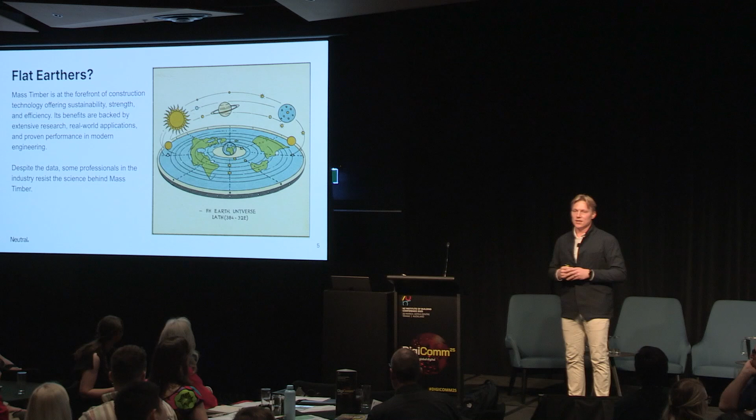What I mean is when we started this whole process and founded the company in 2019, there was no clear path for how we get approved with mass timber in the United States. There was no code, really nothing. We would have to go through all these alternative means and methods requests—variances. We decided, you know what, we'll take the challenge. We're a startup, and we're going to do it.

But what we ran into along the way are these people who said, no, that won't work. No, the building's going to burn down. No, this isn't safe. And we tried to prove them wrong.

One of the first guys we ran into was this fire marshal at the city of Madison. He had this big concern about, even though there had been a bunch of testing, flashover. If you don't know what flashover is—when a fire goes from a really small fire to when the whole building, or whole room, literally combusts. It creates this flash, and it goes from a small fire into a big fire, which could burn the whole building down, which of course would be bad. He said, if you can't prove to me that flashover is not unsafe in mass timber buildings, I will never approve your building.

We were proposing a 14-story building, and I was like, oh, this might be the crux—this might be when our company is dead. So I said, okay, what do we have to do to prove it to you? He said, you have to pay for all this testing, and you have to prove that we won't have a risk of flashover. So okay, I said, let's go through and do the testing.

We found a USDA Forest Products Lab located in Madison, Wisconsin, which is very fortunate. They donated their testing facility to us for free, so we just had to pay for the materials, because otherwise it would have been probably a $200,000 to $300,000 test. Fortunately, we went through the test, and we had just gotten to the end of it after 4 months.

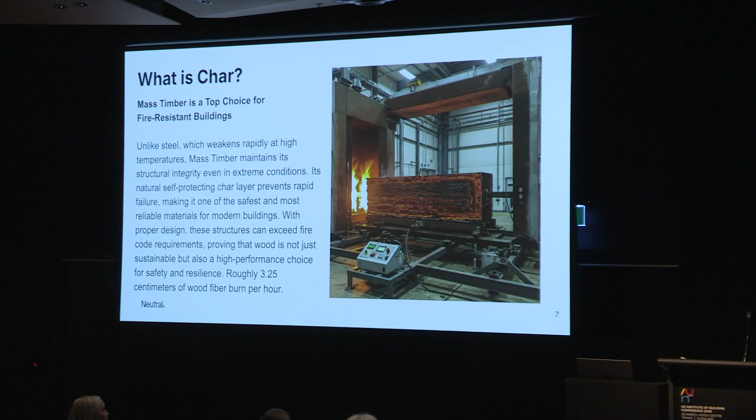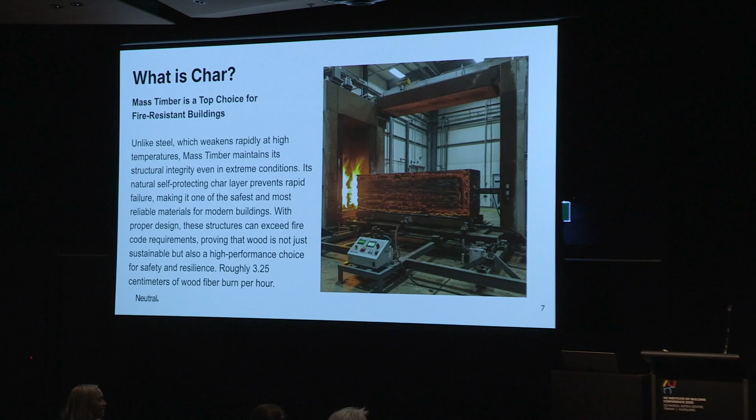We need 3 hours of fire rating for our primary elements, so we have to add that amount of fiber to accommodate the 3-hour fire rating. And that's what we call char.

That's why, if you're asking about CLT—or maybe that's a bad word, I found out yesterday—mass timber is a safe material. It's actually even more safe than steel and concrete, because you can accurately predict the amount of burn no matter how hot the fire gets. Unlike steel and concrete, where at a certain inflection point the steel actually starts to bend under the weight of the heat. We believe mass timber is one of the safest materials to use, and that's why we're advocating for it across the country and the world.

So Bakers Place, this is our first case study into our mass timber foray. This is a 14-story, 206-unit building right in downtown Madison, Wisconsin. We're just wrapping up at the end of this month, and we learned a lot of lessons on this project.

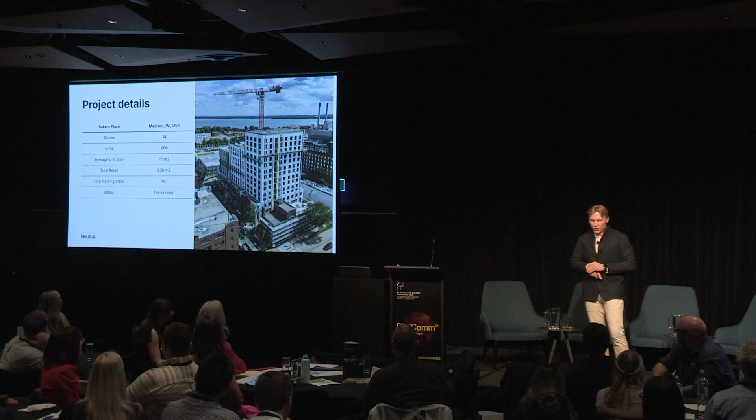It's been one of those projects that I'll probably look back on in 10, 15 years and say we were stupid, we were idiots. There's so many things we did wrong, but we would never be able to get to where we are today without figuring out all the challenges we had.

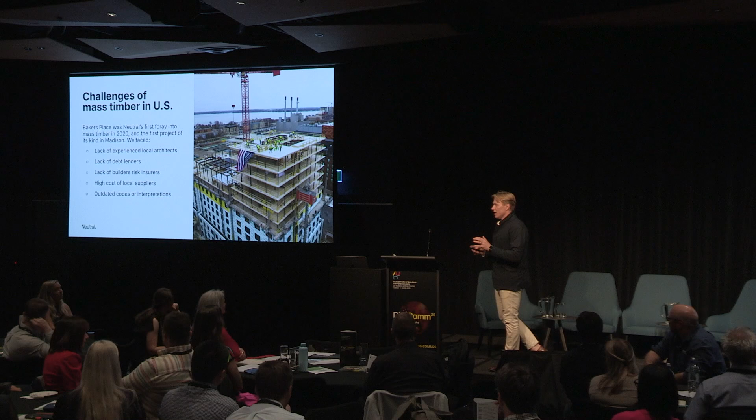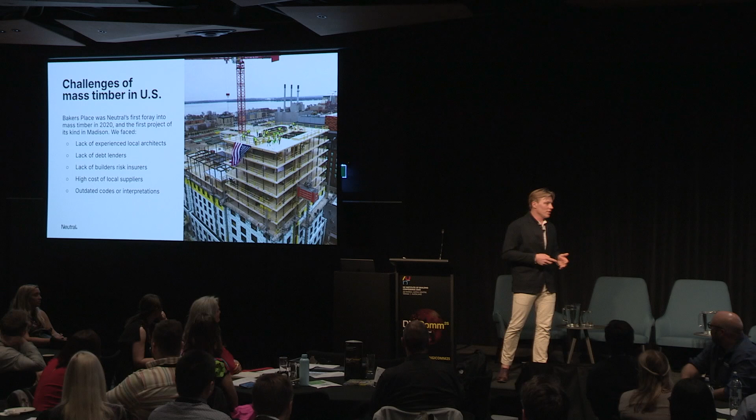Just a few challenges to walk through: we found a local architect, because we weren't vertically integrated at the time, that didn't have a lot of mass timber experience. Because of that, they weren't really understanding the nuances of all the different things compared to steel, concrete, or stick frame that you have to think about and design for. So if you're thinking about building a mass timber building, try to find someone with a lot of experience.

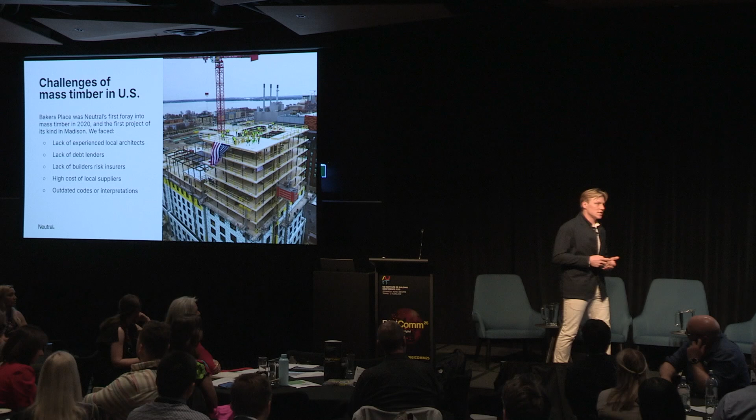The other thing we'll talk about later in the presentation is how we financed our buildings, because a lot of lenders, even equity partners, did not like the idea of mass timber because it's risk. It's new, it's unknown, and that adds layers of risk above the layers of risk of already building a development in downtown Madison.

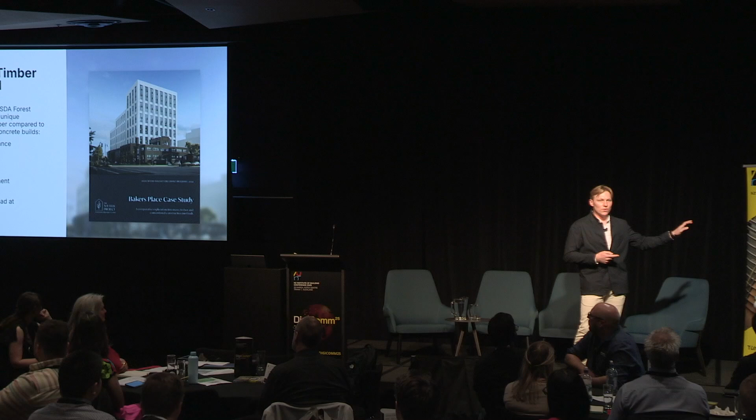We also looked at a few different systems because we wanted to understand the cost-benefit analysis of mass timber versus steel and concrete. USDA gave us a wonderful grant, and they allowed us to model 3 or 4 different buildings up to a level 400 design in BIM, price each one, schedule each one, understand the carbon impact of each one, and look at the cost-benefit analysis of a full mass timber system, a hybrid system, a steel system, and a concrete system. You can go on our website and find that. I won't get into all the details, but if you go to neutral.us, it's right there.

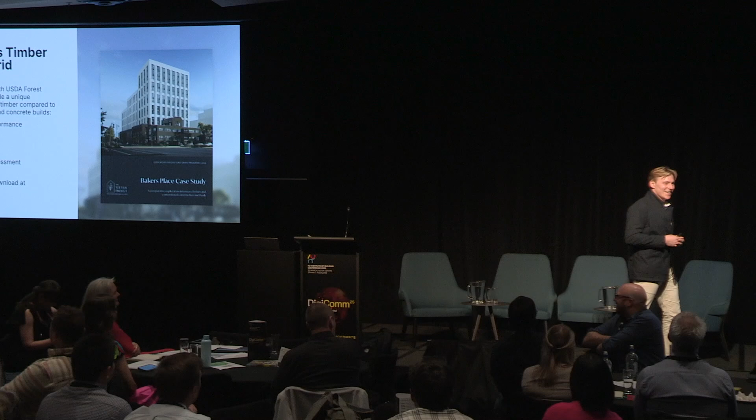Because when we went out to bid this project, we had gone through all of design development, and we went out to bid with our contractors—who are great contractors—and they came back and said, Nate, it's $40 million over budget. And it was an $80 million budget. I was like, oh no, this is terrible. I thought it was the end of our company. This is existential. We were almost out of money.

And I was like, we need to get this project in the ground, otherwise we're not going to have a company any longer. So we went back to the drawing board and did some of this analysis. We were able to value engineer about $30 million out of the scope, and part of it was switching the structural system to this hybrid structure.

On the next project, we decided not to do the hybrid structure for a few different reasons, which I'll get into. But this is the project from last fall where we're just topping out the structure, and you can kind of see the structural elements that are steel and then the ones that are not.

So Neutral Edison is a building that we just started — actually, last week we broke ground. It is a 31-story mass timber, almost fully mass timber building that will be the tallest mass timber building in the world once complete in May of 2027.

We also are pushing the boundaries on sustainability. We have Passive House certification, and we're also the tallest and biggest Living Building Challenge certified building in the world. If you're not familiar with LBC, I would definitely look into that certification. I think it's one of the most holistic certifications because it's not only looking at carbon or energy, it's looking really at a holistic user experience.

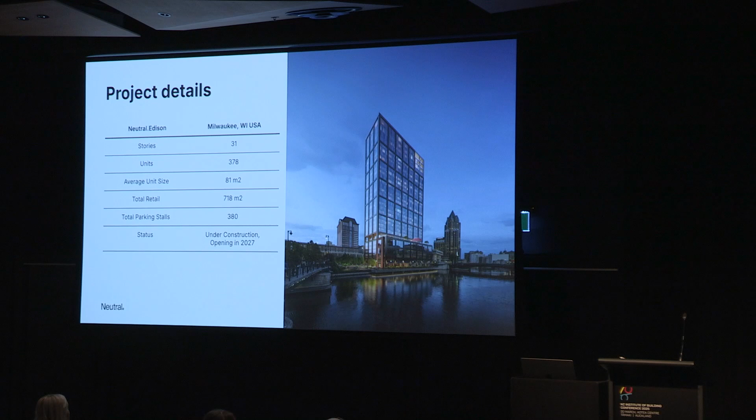What we're trying to do is curate a better user experience for the tenant so they can actually improve their lifestyle by living in one of our buildings. It's 31 stories, 378 units, and we're going to be opening up May of 2027.

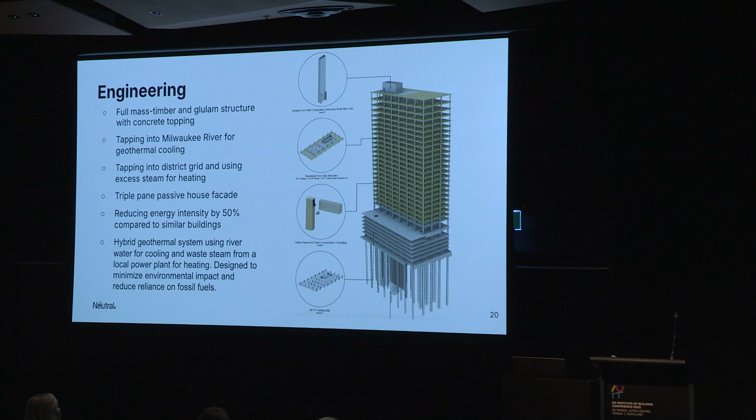For this building, we decided to use a full mass timber structure. We have to build the base out of concrete because that's the parkade, and right now it's not super great to build parkades out of mass timber. But once we hit our transfer, it's almost all mass timber except for our core.

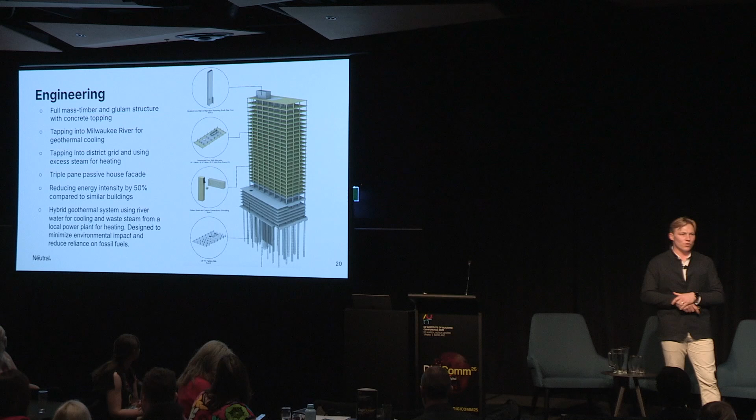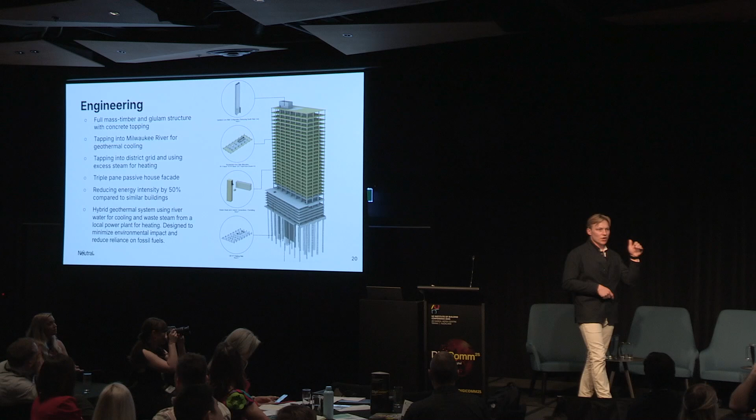We were able to partner with Stora Enso out of Europe to get all of our timber from them. One really cool system we have here is a hybrid, quasi-geothermal system. We're right next to the Milwaukee River, and we're driving piles. As part of our pile design, we asked, could we do geothermal? One of our engineers came up with this really unique system where we're able to tap into the river water and use that for cooling of the building.

And then We Energies, our energy company, has this very old plant that produces steam, which they run through downtown. We're able to use that steam to heat the whole building. So the full HVAC system is almost carbon neutral because we're using a byproduct of an energy company, and we're using the river, which is flowing 24/7, to heat and cool the building.

The other unique thing about this building is because it's Passive House certified, we're at about a 70% reduction of operational carbon emissions. Since we're using mass timber and recycled aluminum for our facade, we're at about a 60% reduction of embodied carbon, which is all the carbon from the construction processes. We're not yet to the neutral state we want to be, but we're getting much closer as we iterate.

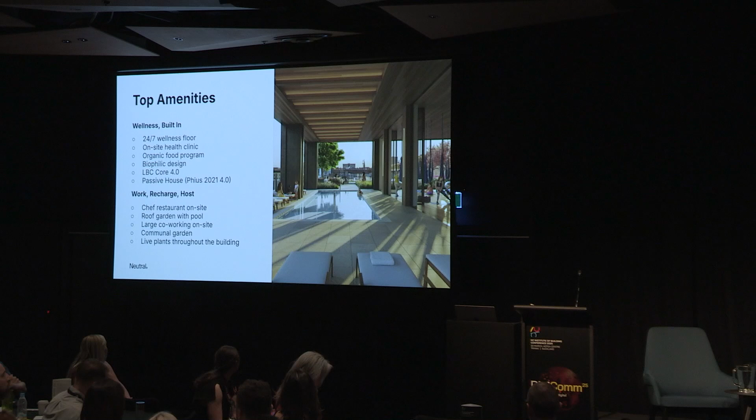The other thing we're looking at, which we'll talk about at the end of the slide deck, is really how do we affect people's lives. Because we're building buildings that people live in — we're not just giving them a key for 12 months and saying go live in this black box, then give us the key back and pay us $24,000 in the interim. No, we really want to figure out how people improve their lives by living in our buildings.

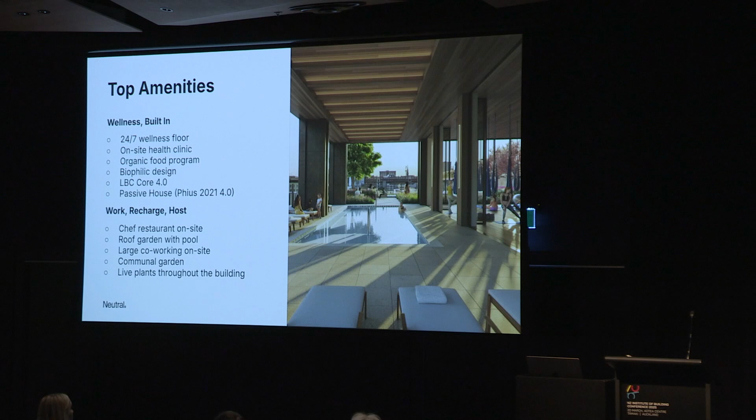So we're looking at air quality, water quality, daylighting, but we're also looking at the actual person themselves — how can we see their life get better from living in our buildings?

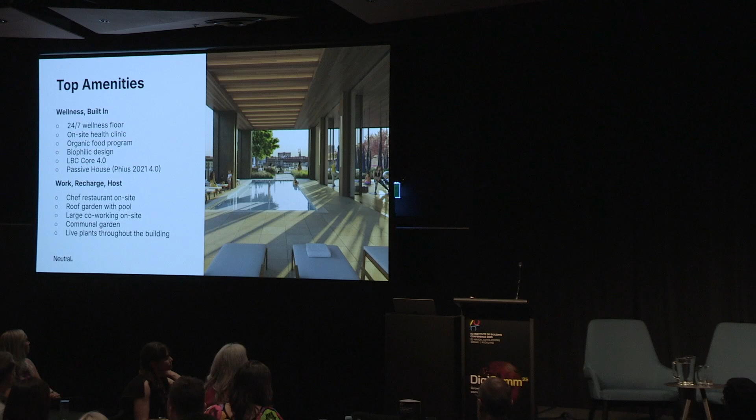We have a holistic wellness program with a huge 15,000 square foot fitness facility, nutrition facility, and clinic. We have a doctor on staff that residents can go to at any time and get a full diagnostic with VO2 max training, resting metabolic rate training, a whole blood panel, mobility analysis — really looking at a holistic experience of not just living in a multifamily building and renting a box, but being able to change your life and go into an experience that improves your health and well-being.

A few lessons learned from Edison. The big one, I think, is we really bit off more than we could chew. It's a $210 million deal that took us about 3.5 years to finance because of how big it was. And I think we'll do it again because we're stupid and that's what we like to do.

But it was something we need to grow and iterate on. So one thing we're deciding to iterate on is our processes and getting more digital. We're just finishing up our low-rise building, our low-rise product line called 517 West Main. The focus here is how we can look at urban cores and do urban infill development, which we call Missing Middle Housing—finding small sites where we can build somewhere between 4 and 50 units in a quick, componentized fashion.

This is the first one we're doing. It's 33 units, only 4 stories. The cool thing about this site is that we acquired it in November of 2023. We had full entitlements by July of 2024. We had full financing by November of 2024. We started construction in December of last year, and we'll finish up in August of this coming year.

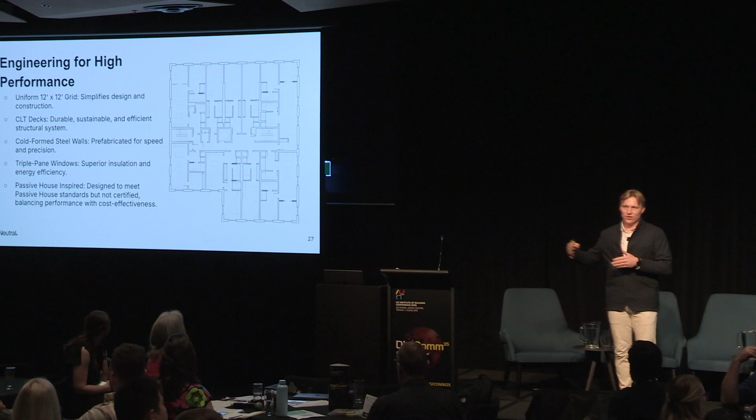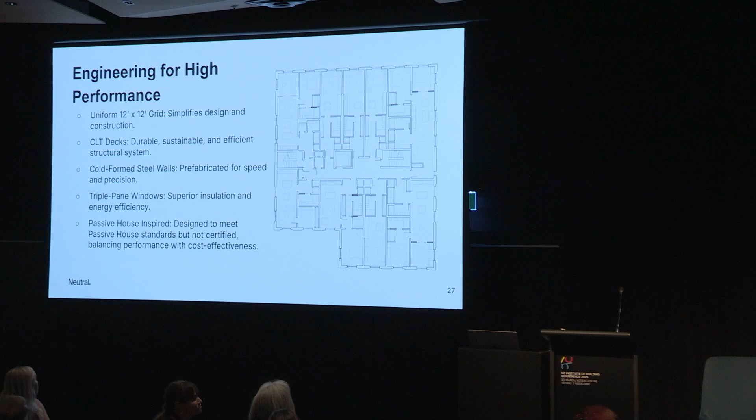A few points on the system we designed: it's a 12 by 12 grid. Maybe you're asking why we're designing a 12 by 12 grid. The reason is we partner with Stora Enso, Binderholz, and KLH—all CLT manufacturers in Europe. And they all have something called a blank.

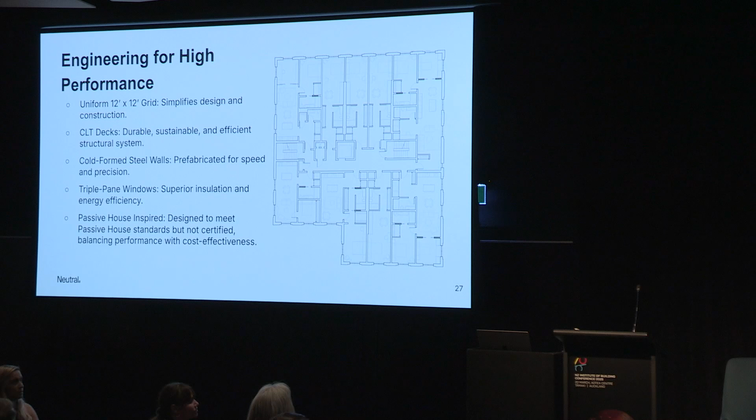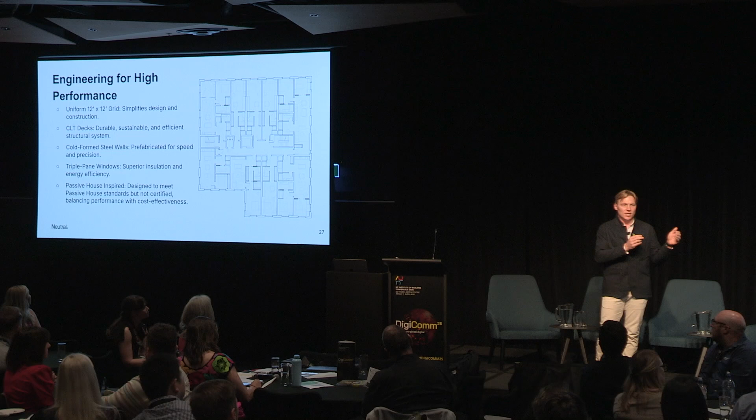What is a blank? It's something they mass produce along in their manufacturing facilities, so they don't have a custom project. All these mass timber manufacturers produce blanks of CLT and glulam, because in Europe, carpenters typically buy those and use them for home building and small projects without any customization. This creates a very efficient manufacturing process that's much cheaper than designing a custom building and routing out all these nuances into the CLT panels.

So the reason we chose this 12 by 12 grid is because we're using those blanks and trying to have the most efficient manufacturing process. We're also prefabricating all of our walls, which are cold form steel framing, up in Fond du Lac, about an hour north of Madison. Those walls are also on a 12 by 12 grid. They come to site, and we're able to erect them very quickly and put the CLT deck right on top—it's all load bearing.

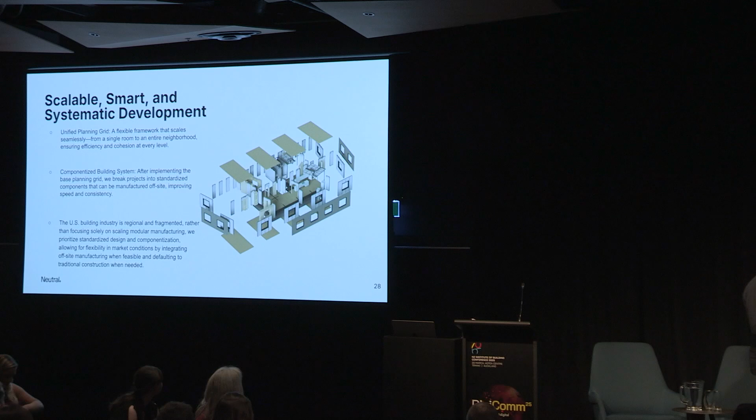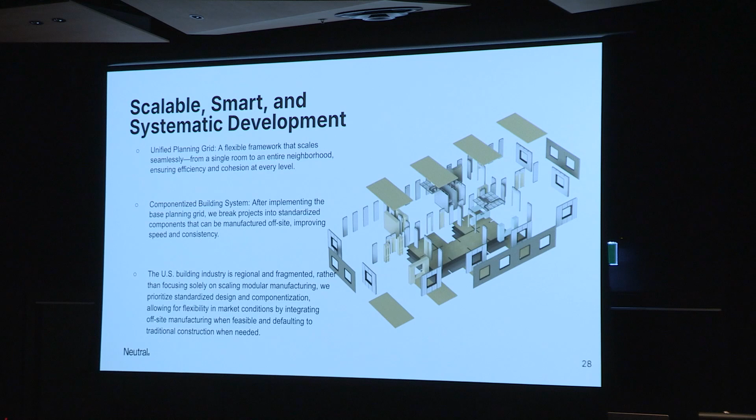So if you look here, we expanded it and then contracted it for you. We have CLT decks, cold form framing walls, bathroom pods, and even a custom kitchen assembly from Bath Systems down in Austin, Texas. The idea is that this all goes together really quickly, and it's able to be iterated on and utilized across a lot of different sites because it's all based around 12 by 12.

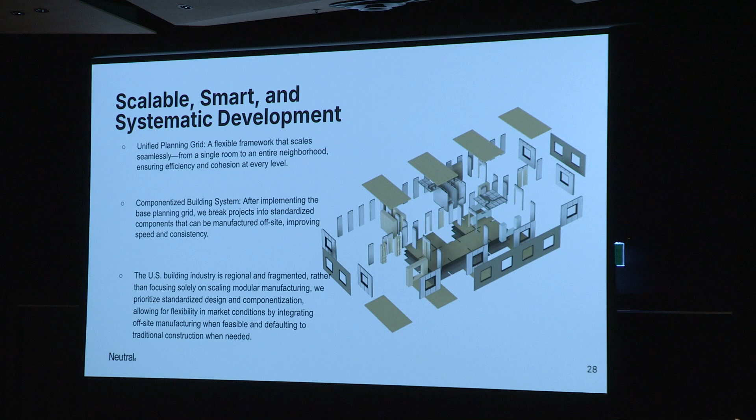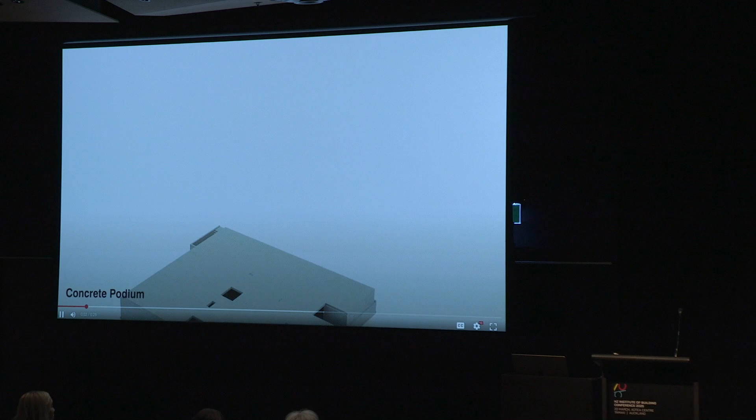So we can drop this 12 by 12 system on any site, and we can very quickly figure out what the cost is, how long it's going to take, and what the process is for erection. This is vanilla, just our CLT decks and cold form framing walls that you can see here.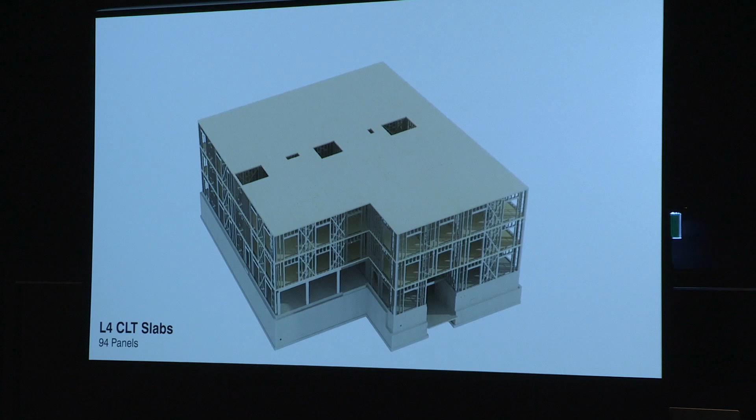We went up very quickly, but we unfortunately got a little bit slowed down because we had a fire on the ship. The CLT left Bremerhaven, Germany about 2 months ago.

Between Germany and Scotland, I get a call one morning from a German guy. He's like, 'Nate, I got really bad news for you.' I'm on a run at 5 a.m., and he says, 'We unfortunately had a fire on the ship.' I'm like, 'What? A fire on the ship? That sounds terrible. What happened?'

He's like, 'Well, it's not your timber, but it is going to cost you some time.' The ship ported in Aberdeen, Scotland, and when it ported they had to do all these crazy insurance things and claims. It cost us 3 weeks, and 3 weeks later that shipment left.

In the interim, they shipped the other shipment because our floors were separated, so floors 1 and 2 were on one shipment, 3 and 4 on another. I said, 'Guys, our engineers, could we use floor 3 for floor 1? Sounds like a crazy idea.' They're like, 'I don't know if that would work, Nate, but let's take a look.'

We modeled it up in BIM and were able to switch out floor 3 with floor 1, because of how systemized our approach is and how rigid we'd been about making sure every single stack is aligned with no deviation throughout the whole grid. It was a very painful experience, but we learned a wonderful lesson: we can quickly iterate on these processes.

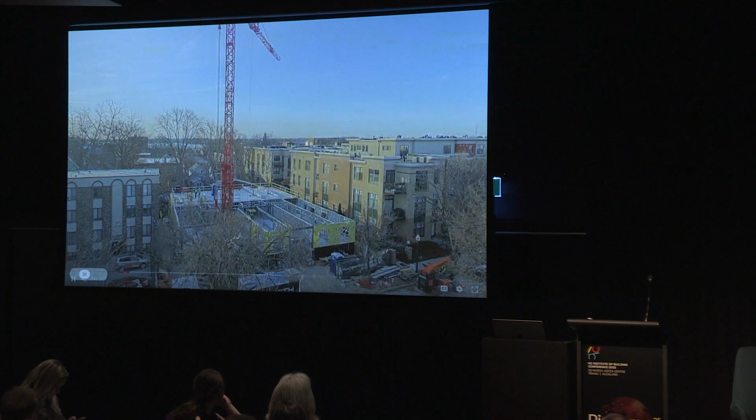I just want to show you one video of our erection process. This was 2 weeks ago, when we were able to get our CLT decks on site. We had our cold-formed framing just sitting there waiting for the CLT, and we were able to get it on site and put it up within only 3 days.

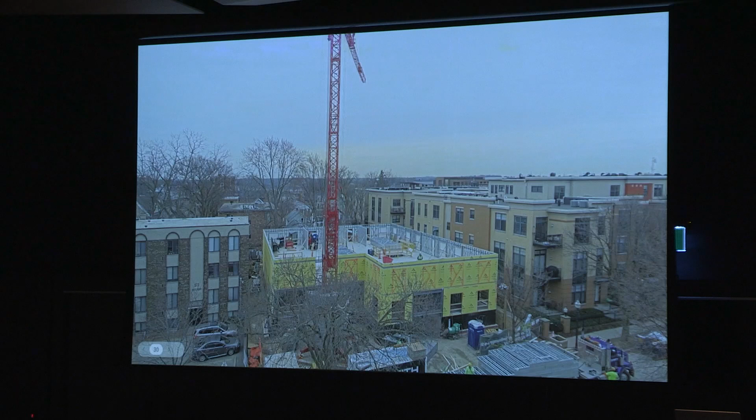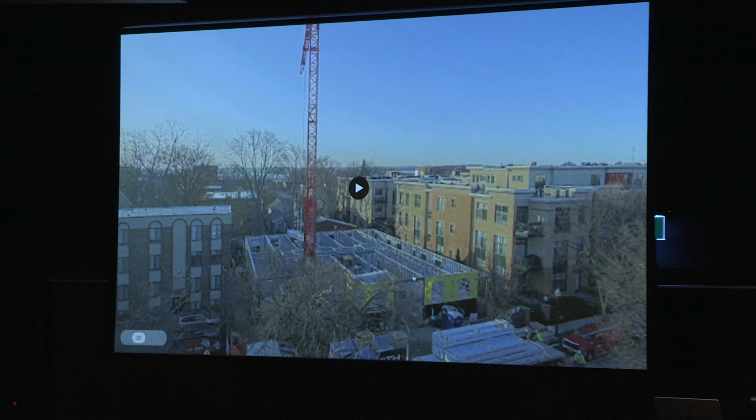Then we were able to bring in our next cold-formed framing, put that up in 4 days, and now this week we're starting our second floor. We'll be topping out April 17th—what we thought would be a 22-day delay is now only going to be an 11-day delay. It's really about creating componentization so we can quickly iterate and build very quickly.

I'll end on this one. This is what we're working on right now: our digital tools. My partner Matt owned a big tech company and sold it to Carlyle for $1.2 billion. He decided we need to be more tech-enabled, a tech-enabled developer with more iterative processes. We're starting with site analysis, but trying to do it through the whole development process.

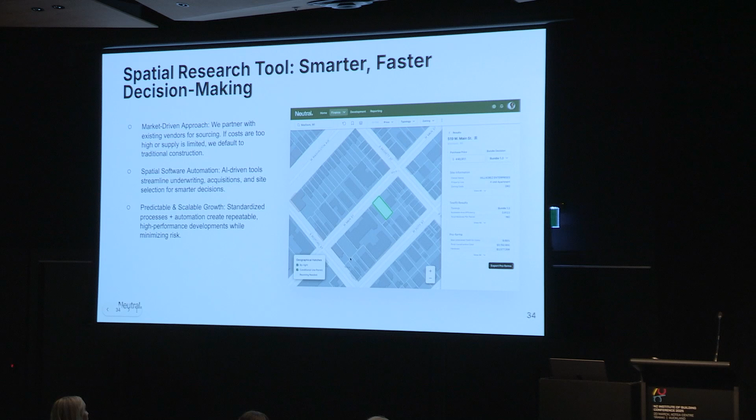So I'll quickly walk you through what we're doing. The first is our spatial analytic research tool—that 12 by 12 grid I was talking about, we can drop that into any GIS map. QGIS is a big mapping system in the States that we use. We can drop it in and quickly figure out the geometry for the site, then using our bill of materials figure out what we'll need to build this type of building on this site—whether 2 units, 4, 8, or 12 units, whatever it is. This tool is still in beta; we're just using it on this first project.

And we're hoping that eventually we'll be able to, within seconds, quickly compute what the return on investment will be for a specific site, to figure out does that site work for us to buy, or should we move on to the next site?

After that, we go into design. So once we figure out this site works, let's go through the rigorous design process. We start creating systems where we have a bill of materials, a material library with all those components. They all break down into different elements, and all those elements have costs. Those costs go into our bill of materials, which are then used to build our financial model and also used to put together our project schedules, so we can accurately understand the financial implications of building this building on this site, and continue to check whether it has a good return on investment or not.

And so that's the second part of our tool. The third part is really understanding the financial model so we can launch this to the market. One big thing we found is we initially went out and tried to find a big check, a big pension check, $100 million, $200 million to fund all these projects. And it was not there. It was right in the midst of COVID. Everyone was shutting doors in our face, and it wasn't working.

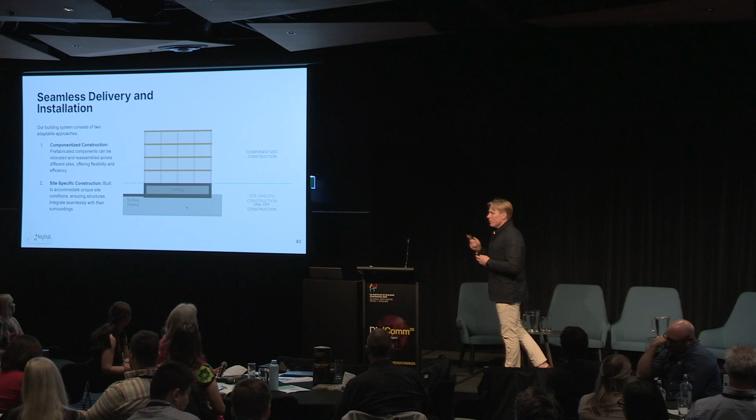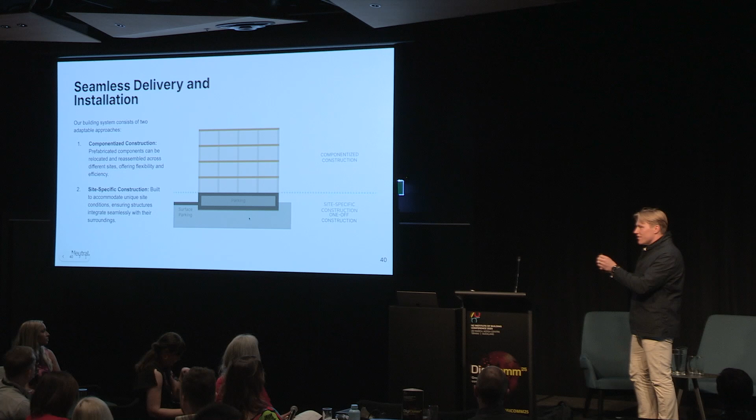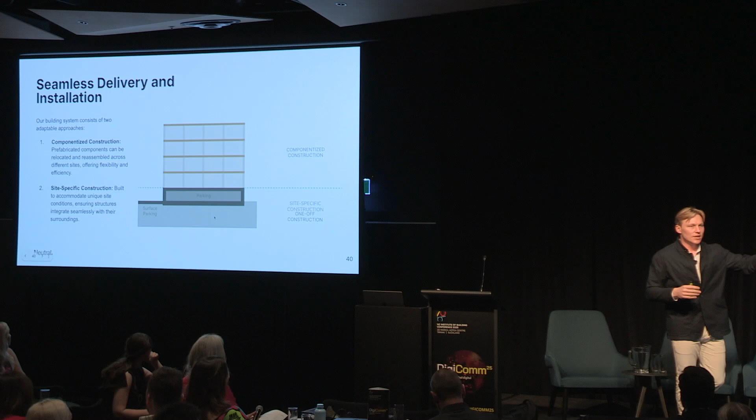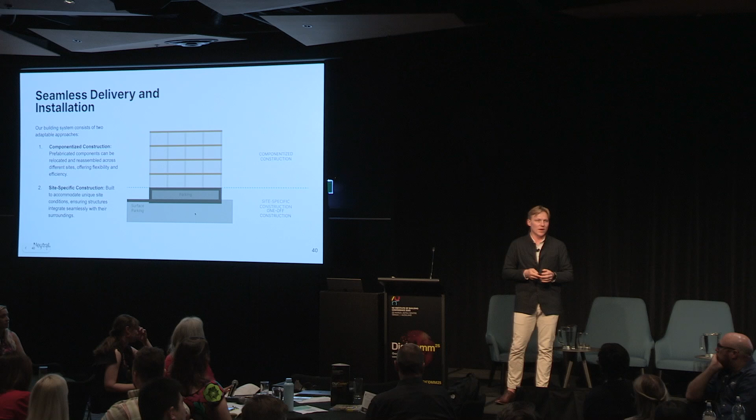The next part of this process is a streamlined delivery model. What I talked about earlier in that story is really a testament to how we're doing this. Essentially, we have two parts of the building: one is componentized, one is site-specific. The reason we've broken it out like that is because when we were planning the system, we were looking at QGIS, and you see all these different shapes and sizes, different grades of different sites. Thinking about how to create a system that can compute any specific site across all sites is very difficult. So what we decided to do was site-specific construction for the lower portion of the building, the parkade, and then where you see that green datum line, that's where we hit our transfer - that's where we go to our 12 by 12, a very componentized system. We did that to stay efficient and have all our components based on the same transfer slab instead of modulating to different sites.

The last thing, and I know I'm on time so I have a minute, is we've really focused on health and well-being. What we're doing is we have a great clinical space that each tenant can come into when they sign their lease. We take them through a rigorous diagnostic - VO2 max testing, RMR, a blood panel test, a DEXA scan - and then we give them a diagnostic of what they should be doing while living in this building: this is your personal trainer, this is your nutritionist. We also have great access to an amenity pool for all our large developments that tenants can use. It's really focused on how we get people back to understanding how we use natural materials, and understanding that living in a building does affect their life - and by choosing the building they live in, it could affect their life positively or negatively. We hope that at Neutral, their lives will be affected in a positive way.